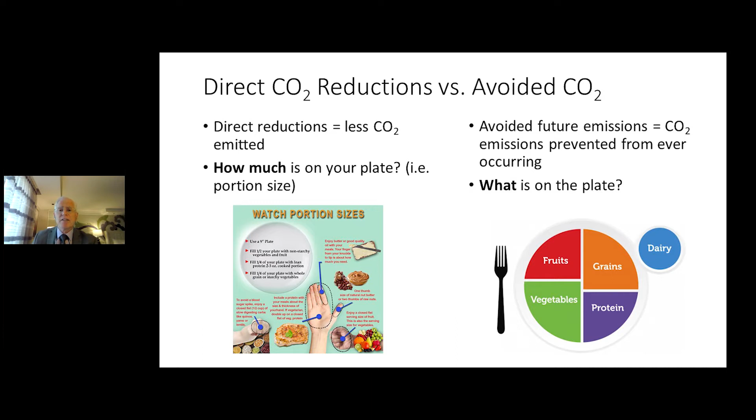And again, using the weight control analogy, it doesn't matter if you have a very small portion size if all you're eating are bacon triple cheeseburgers. That may sound crazy, but let's face it, that's not going to help you too much. So avoided CO2 is essentially what is on that plate.

Now, to do that, what we'll find and what we have seen is that most of what we can do is actually doable today. There are reasons why it's not being done. In some cases, regulatory disincentives. In others, it's simply a question of folks haven't been able to adopt these technologies as quickly as they would like. I want to talk about optimization, though. A lot of what we can do is simply an optimization exercise. And what that means is twofold.

I think we're all familiar with the bell curve, so we can do two things: shifting the curve and tightening or shaping the curve. By shifting the curve, if you think about it, you have people that are on the far right-hand side of the curve. They're the star performers. People on the far left, they're lagging behind. Shifting the curve simply means that the people lagging behind, or the products, or the materials, now become the average. The average, because they're being shifted, now become the excellent or the star performers. And the star performers continue to always do good, and they're always pushing the envelope.

Shaping the curve means that rather than having a flat curve, we actually have a very tight curve. So the difference between the star performers, the star materials, the star producers, and the less star performers, the less star producers, the less star materials, the difference is actually much, much smaller.

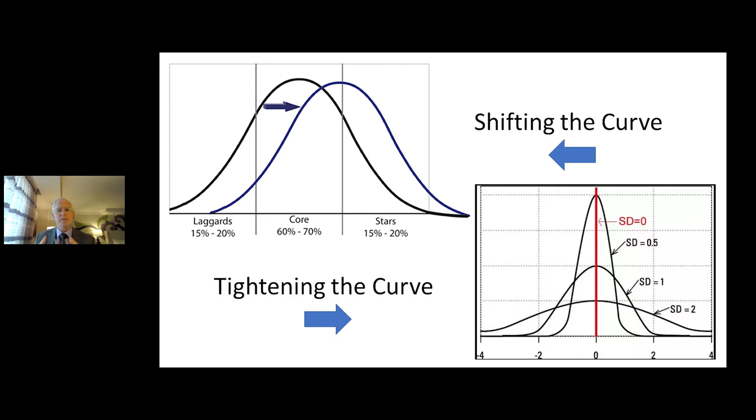So we start our value chain with an intermediate product called clinker, which, by the way, unless you go to a cement plant, you will never see. It is an intermediate product, but it is a critical product in manufacturing cement. Now, when cement is manufactured, roughly more than 60% of the CO2 that's emitted is emitted because of the chemical process. If we don't emit the CO2, we don't make cement. It's just that simple. To make that chemical process requires tremendous heat, and that requires combustion. So slightly less than 40% of our CO2 emissions come from combustion.

What can we do to reduce the CO2 footprint there? Firstly, we can look at other materials that don't have to go through that processing. Those include what we call decarbonated or pre-calcined raw materials. Materials from other industries like the steel and slag industry, the fly ash industry. Second thing we can do is increase our efficiency. Cement manufacturing is one of the most thermodynamically efficient processes.

But by optimizing and shifting the curve, we can get even more efficient tomorrow than we are today. The third thing we can do is looking at the CO2 coming from combustion. We can look at using different fuels that have less CO2 emissions, a lot of alternative fuels. And by the way, that also includes things like switching ultimately to hydrogen and other transformative fuels.

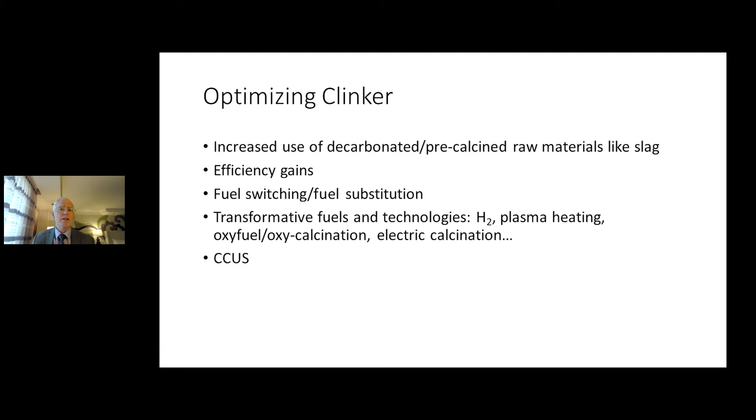And then looking at carbon capture, use, and sequestration. We think there's a huge role for this. And as we get closer down the road in our roadmap, we know that CCUS will be a big part of that plan. So that was the first link in the value chain.

Well, number one, we can use less clinker and use other materials like limestone. Using a product called Portland limestone cement, we can reduce the CO2 footprint of cement by up to 10%. That's a product already out there today. It's readily available, and it's just a question of overcoming institutional inertia.

People ask me, well, what's the difference between Portland limestone cement and other cements? And I use the analogy, it's a little bit like the difference between regular Coke and Coke Zero. Same taste, same caffeine amount, but different formulation. We can also optimize cement by looking at new cements.

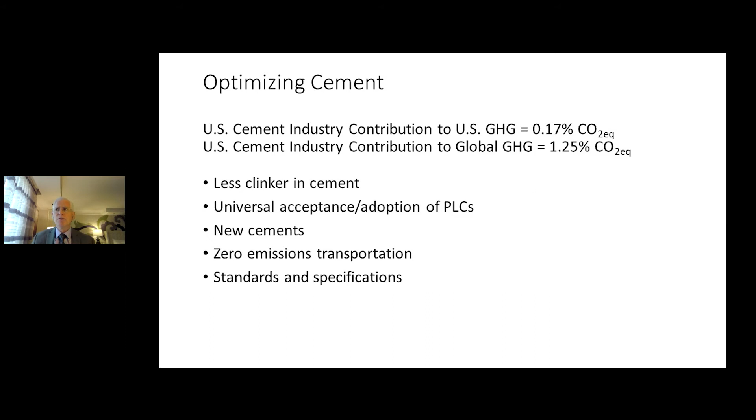And keep in mind, we've got to ship our product all sorts of places. So we can get to carbon neutrality by looking at zero emission transportation. We've been working with the rail carriers who are already envisioning switching diesel locomotives into electric locomotives. Likewise, shipping our product by truck. We all know that there's now a move afoot to shift that truck fleet into zero emission vehicles. So that was optimizing clinker, cement.

Now we get to concrete. Cement, when it's mixed with sand, water, slag, fly ash, silica fume, limestone, all sorts of other materials, becomes concrete. You walk on a concrete sidewalk, you live in a concrete apartment building, you land on a concrete runway. We can optimize concrete by using increasing amounts of what we call supplementary cementitious materials. I've mentioned a few of those.

We can optimize concrete also by reducing the amount of energy that it takes to actually mix and transport this material. And again, looking at things like zero emission vehicles. And of course, also cutting down on the energy required to manufacture and mix this material up. And then finally, there's a variety of breakthrough technologies that material scientists are working on even today.

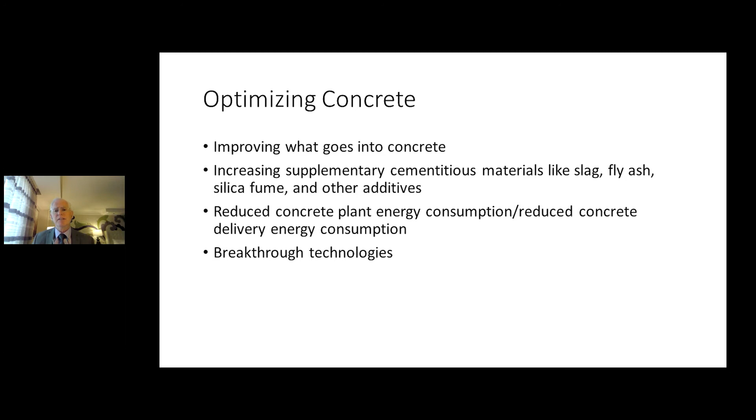So our product, though, is not clinker or cement, or for that matter, concrete. Our product is a built environment. And this is really a key linchpin to our roadmap to carbon neutrality. How do you optimize construction? There are 4 phases in construction: design, construction, use, and end of life. And there are things we can do within each phase.

I want to emphasize everything I've mentioned, including the material on this slide, these are things we can do today with the right regulatory framework and the right incentives to do so. So in the design phase, things like 3D modeling, building information modeling, virtual reality design. In the construction phase, looking at zero waste construction sites, which has become the norm in Europe, but has not happened here in the US.

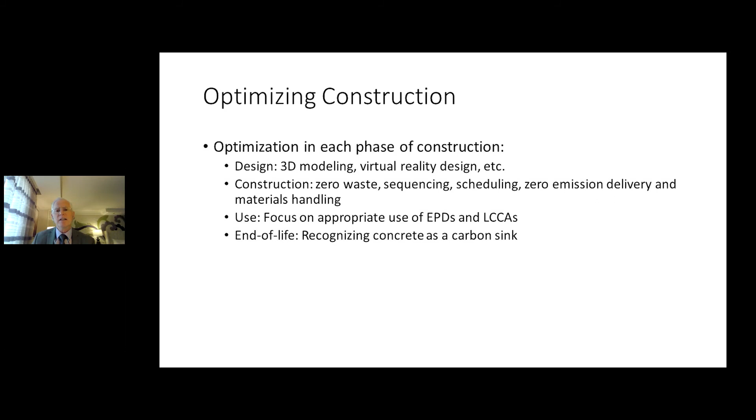On the use side, you've probably heard about environmental product declarations and life cycle cost analysis. So rather than look at a product's carbon footprint from cradle to gate, look at it from cradle all the way to grave. And actually with concrete, there is no grave because all that material, even when it's demolished, can be reused. And at the end of life, again, I'll cover this a little bit later, is recognizing that concrete can be used as a carbon sink.

And by the way, we're not the only ones that recognize the benefits of optimizing construction. The US General Services Administration has what they call a high performance building program.

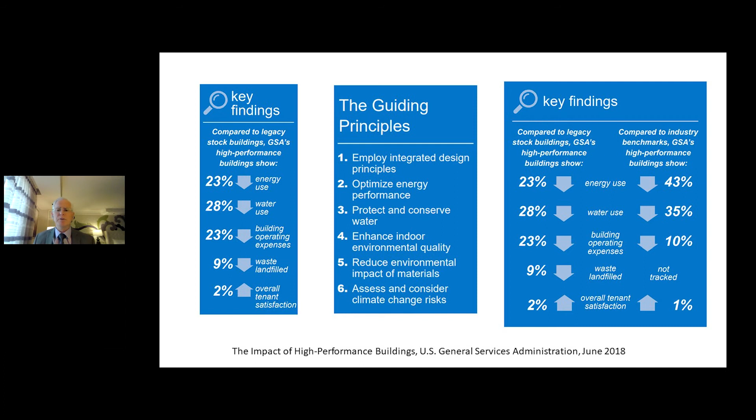Not only is this a high performance building that really has great benefits for society, it has great benefits for tenant satisfaction. Real basic things to do. I've listed a half dozen things. So again, even the federal government in the United States recognizes that optimizing construction really is the key to our future. And then finally, concrete as a carbon sink.

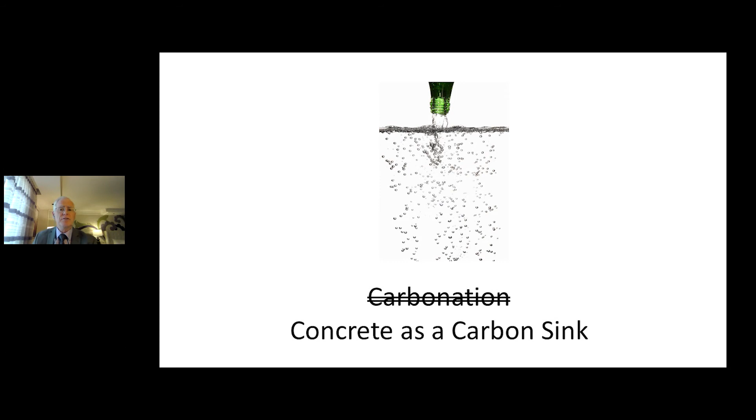Most people don't realize this, but it is a technical fact, a scientific fact that we've known about for almost 100 years. Concrete absorbs CO2. It is one of the few inorganic materials that can do so. And the fact is, once concrete structures are put in place, as long as they are exposed to the air, they will start to absorb CO2 and continue to absorb CO2 throughout their lifetime.

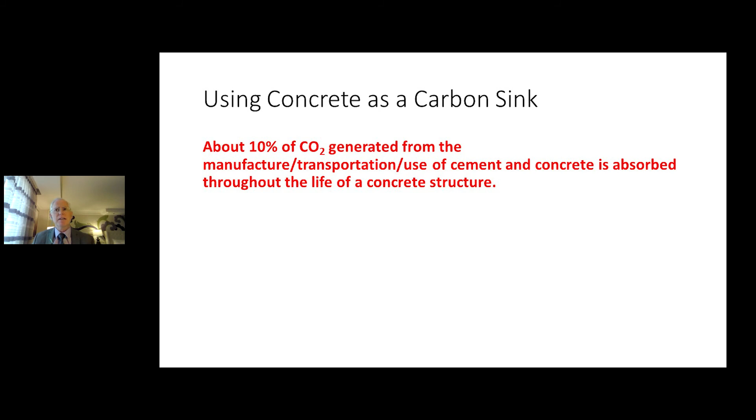So, key point that most people aren't aware of, about 10% of the CO2 generated from the manufacture, the transportation, and the use of cement and concrete is actually absorbed throughout the life of a concrete structure. And in fact, because we're looking at a circular economy, concrete as a material can be recycled and not only used as aggregate for new concrete, but in many cases can be used as feed material back at the cement plant. So essentially turning the cement and concrete value chain into a circular economy.

So at each step of the way, our value chain includes what we can do to get to carbon neutrality. A couple of key points. No one link in this chain will get us to carbon neutrality. Each one of them is required. However, all of them can get us to carbon neutrality by 2050. Second key point, we cannot do this alone.

The US cement industry is endorsing finalizing our roadmap on June 29th. At that point, we'll be reaching out to everybody and anyone who touches any part of this value chain. Now that includes a lot of people like rail carriers, truck manufacturers, cement plant providers, refractory equipment providers. It also includes contractors, consultants, designers, anyone who works with cement and concrete. It includes policymakers. We're reaching out because we need their help to get to carbon neutrality by 2050.

I'm often asked, well, can we get there sooner? Yes, we can, with the right incentives, with the right support. And that includes everybody. I'm dating myself, but I can remember when recycling wasn't a big deal until people started to realize, hey, this is important for our planet.

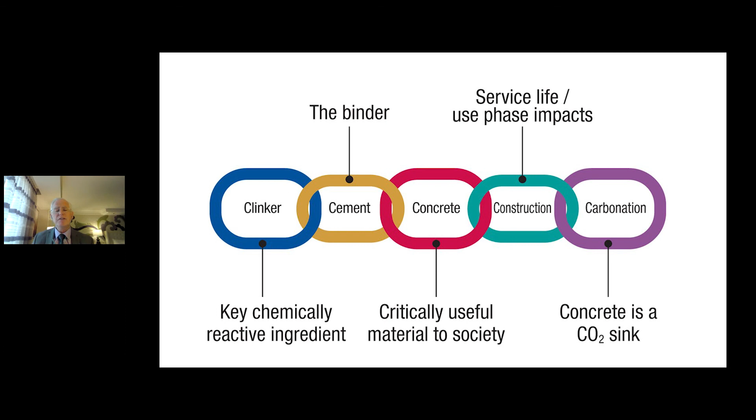So the entire value chain, starting with clinker at the cement plant, an intermediate product you will not see, followed by cement, the glue that holds everything together when it's mixed with sand, water, and aggregate to form concrete, which is, of course, one of the most useful and innovative building materials known to mankind, which also creates our built environment in the construction link phase. And then finally, recognizing that just because the building is standing doesn't mean that the story ends. That building will continue to absorb CO2 throughout its lifetime.